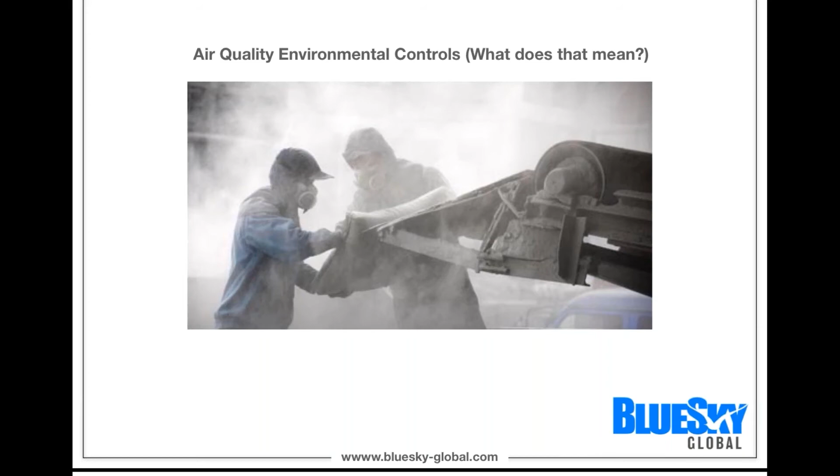So the idea is environmental controls. Why? I've already spoken about it - it's risk reduction. And again, I can't overemphasize, there are toxic dust types where there is an immediate risk to health. You breathe in arsenic dust, you can die right away. The dust that is the dangerous species is the stuff that doesn't necessarily affect you right away.

An everyday example is cigarette smoking. People can smoke for years and feel fine, right? A 20-year-old smoking can be an athlete, can be a sportsman, full of energy, continues to smoke, and then the price is really paid later. So risk reduction, which I've got on the left there, is the paramount reason for introducing environmental controls.

And then the second benefit, which to me is a huge direct benefit, is just cleanliness. If you think about it, a facility that is very dusty, that dust does settle, a large proportion settles, so you've got a dirty environment, you are continuously redisturbing the dust. It smells bad, so any visitors that come in, the whole environment that is under a cloud of dust is always a dirty environment - to the touch, to products, to our clothing, to our hair. So by bringing in environmental controls to control dust, you reduce risk.

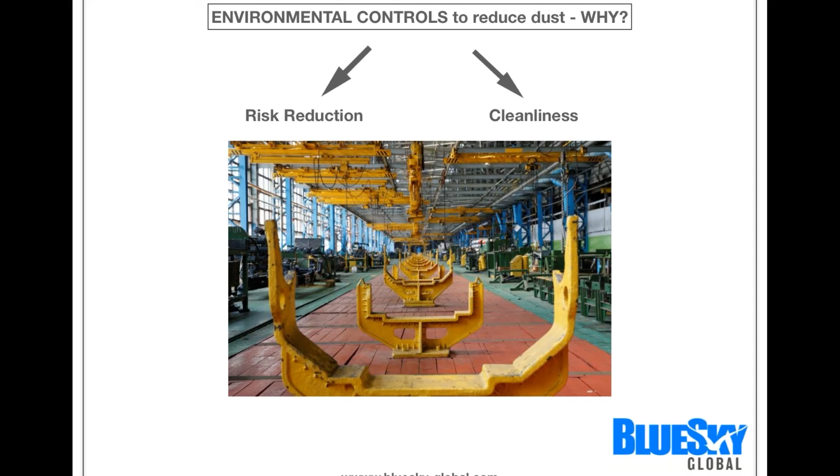By the way, risk could also include explosion risks if it's the food industry, or a type of powder, perhaps a metallic powder that is flammable. So this risk reduction in health, explosion, and then on the other side is cleanliness, which is a huge benefit just in terms of work practices, clothing, equipment, things like that. Okay, moving on to environmental controls in terms of risk reduction and cleanliness.

That is almost common sense. I think it doesn't require a big sales pitch or a huge degree in environmental control to realize reducing risk and cleanliness is an obvious consequence of putting in environmental control for air.

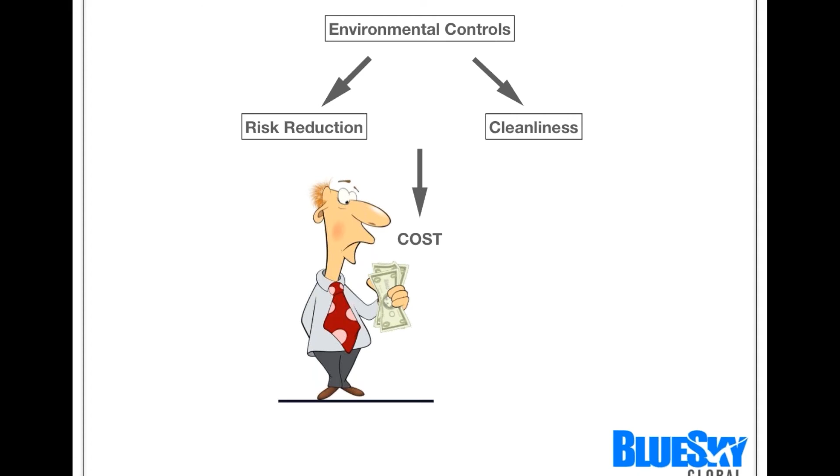But the reality for a business or a retail outlet even, or a warehouse which may have a lot of dusty packaging, is cost. It costs money to implement environmental controls. So it would be naive to say that cleanliness and risk reduction is a no-brainer, let's do it immediately. It is a very, very expensive thing. Okay.

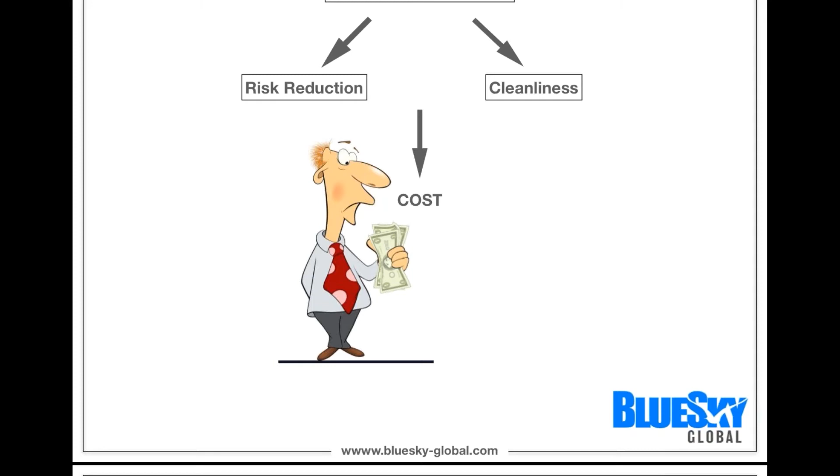So there are two approaches that can be taken. With environmental control, it normally goes to the left process, which is from an accounting perspective, needing to minimize cost. So you want the benefit, but you do not want to have the cost of it. So there's counting the cost. And then there's the value perspective, which is the strategic perspective, where it's like a chess game.

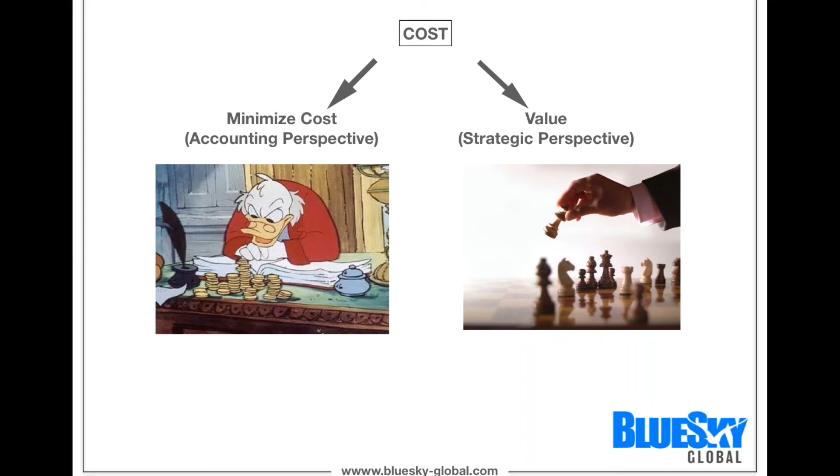You're kind of trying to think about, okay, I've got to spend money. What are my benefits? What are my indirect benefits? I kind of laid it out over here. So from the cost risk perspective, you've got on the one side, what is the cost financially? Remember, this is a financial perspective. What is the cost of one serious health claim?

An example, you may be a factory, or let's take a benign example where you would imagine there's no risk, a big warehouse, and there's packaging that comes in covered in a layer of dust. It comes from a paper mill or whatever type of dust it is, and you have a dispatcher who is always receiving dusty packages, handling them, always getting dust in his lungs, works in the job for 15, 20 years, and after 25 years develops fibrosis of the lung. What is the cost of that individual's health claim?

So that is one cost. Does he request it of the company? Does it end up in lawsuits? In the USA, it could be a lawsuit. It could involve other people in the lawsuit. Maybe other people go, gosh, I have breathing problems too.

So that's a future cost of a serious health claim. Then the next one is the cost of an environmental claim. You may be in a factory producing a certain product and there is a byproduct. This is how I ended up designing and developing Blue Sky as an environmental control dust collector. We did metal coatings, and one of the byproducts of our metal coatings, they were fabulous. They were nickel chrome alloys, but one of the byproducts was hexavalent chrome. So as we were spraying these nickel chrome alloys, chrome was being liberated.

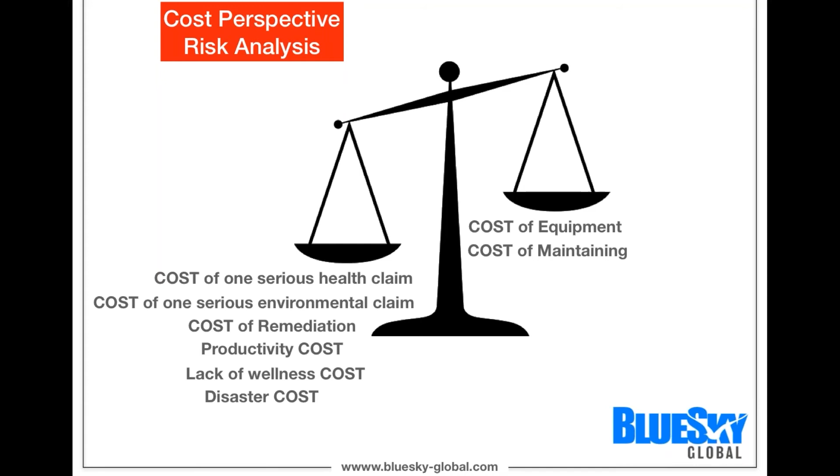And of course the benefits analysis, which is not usually in the accountant's realm, but in the CEO or operations manager or human resources divisions of companies - you have healthier people. Clean workspaces means they are proud of their workplace. Housekeeping improves. Imagine a warehouse that's very dirty - the stock taking, the control of everything is all impacted by filth. So by controlling airborne dust, pride in the workplace improves, and there's a culture of excellence.

I did one installation in Holland a couple of years ago of Blue Sky, and the CEO was very, very motivated by the benefits analysis in the beginning about reducing risk, that kind of thing. When I met with him two years later, as a hindsight analysis, I wanted to know what he thought was the best benefit. He said it was client recognition.

He said he had several clients who walked into his facility and said, wow, your facility smells clean. We've been in many manufacturing facilities, but your place stands out to us, we're impressed. So client recognition was something he actually checkmarked as an unexpected major benefit to him. He gladly took his people around the workshops, and they recognized the difference.

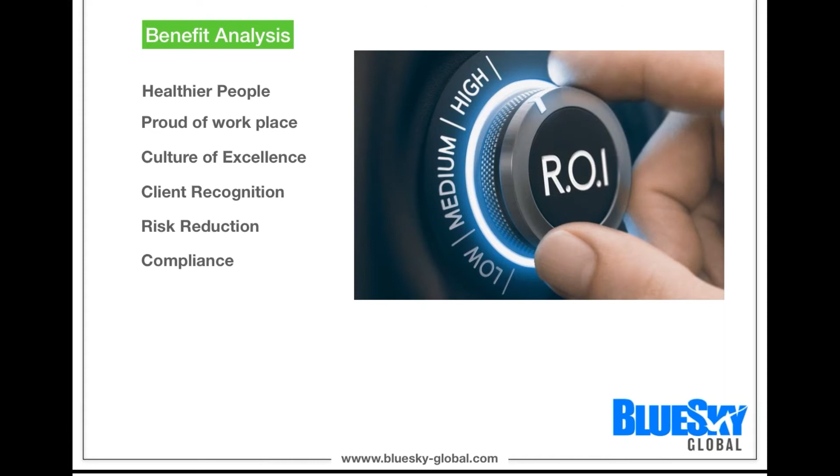So those are the returns on investment of putting in air quality control. With all that analysis paralysis done, it's time to go out shopping. The question really is, people are buying a mousetrap, and there are lots of different devices on the market to catch a mouse. Are all mousetraps born equal?

One thing I have to say right now is that a mousetrap, by definition, catches mice. A dust collector, by definition, collects dust. So the actual functionality of 99.9% of dust collectors is good. The question is, are they still equal?

The answer is that you have to dig a little bit deeper, and it comes down to, once you've caught that mouse, what do we do? There are many, many devices you can buy that can catch the mouse, but exactly what happens when you've got the mouse, or how you set the trap - there's big variation there.

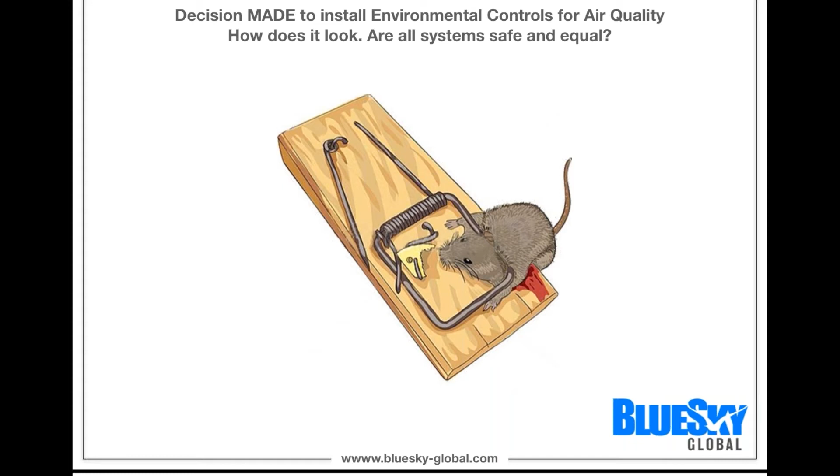There's a reason for that. Once these dust collectors have been in service and collected all the stuff we don't want to breathe in and don't want to have in our lungs, it's now in those filters. It shows you how big those filters are. That is where the concern comes.

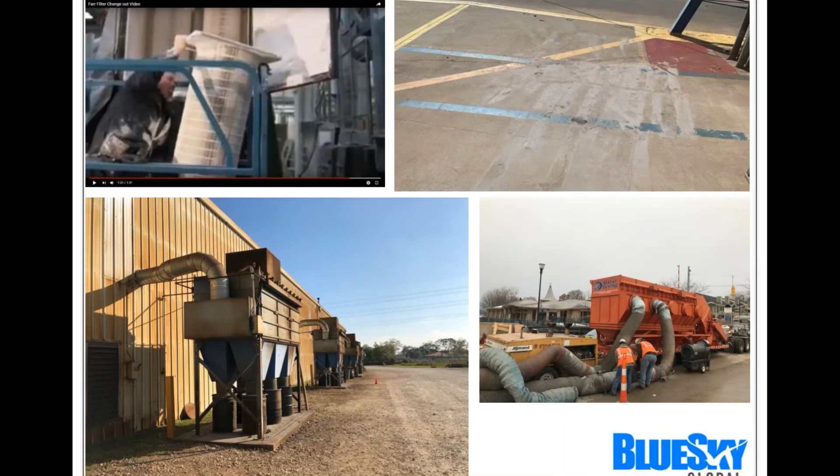And that's where Blue Sky came from, because the reality is that dust collectors using the mousetrap, top left, these are heavy, dirty filters. And you look on the ground after a service, you've now got all that fine particulate on the ground.

The wind will blow it. It'll be all over people's clothes. Yes, PPE, all those good things, but typically when you're servicing a dust collector, you've contaminated the ground, you've contaminated the air around that, and the equipment that lifted people.

That's the real world. You can see bottom left, that is an installation that's been in for a while. They did a soil test there, and it's completely contaminated. They're going to have to excavate down a couple of feet, and do something about all those buildings. That's after years and years of work.

You can see on the right-hand side bottom, there's a picture of a dust collector that went onto a bridge project, in Charlevoix, Michigan. That's a drawbridge. They brought in the dust collectors because they couldn't put the dust in the water. They were sandblasting, repairing, and painting that bridge. So they brought in the dust collector, and you can see how fantastic the real world looks.

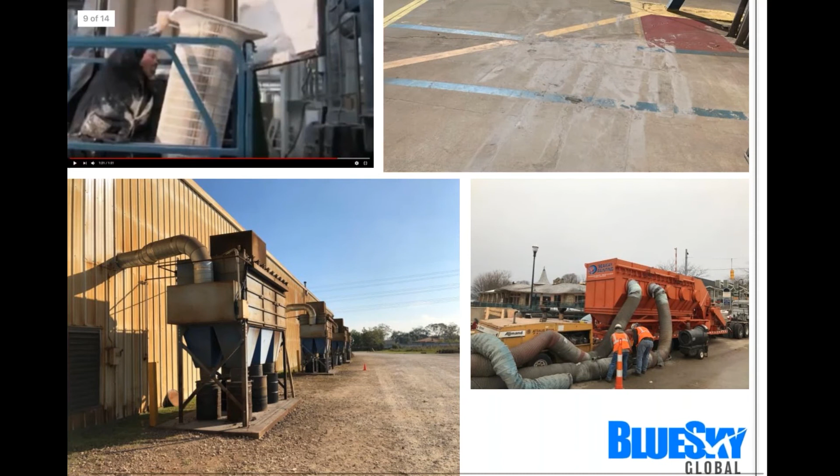Okay, so that—I was dealing, with my previous company, with filters that looked like that, but covered in hexavalent chrome. I was dealing with the environment.

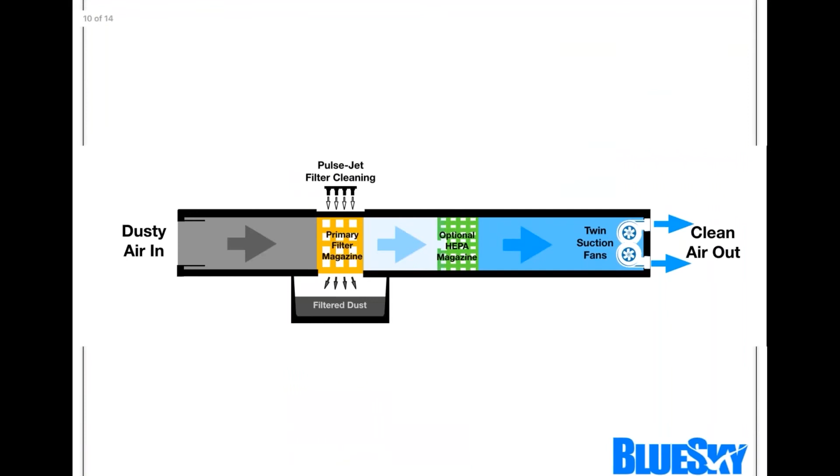Oops. Looks like my presentation is having trouble. So let's see, that slide seems to have been killed. Okay, I've lost the slide. Sorry, there's something wrong there. But I was having trouble with the heavy filters and the soil conditions being really, really bad.

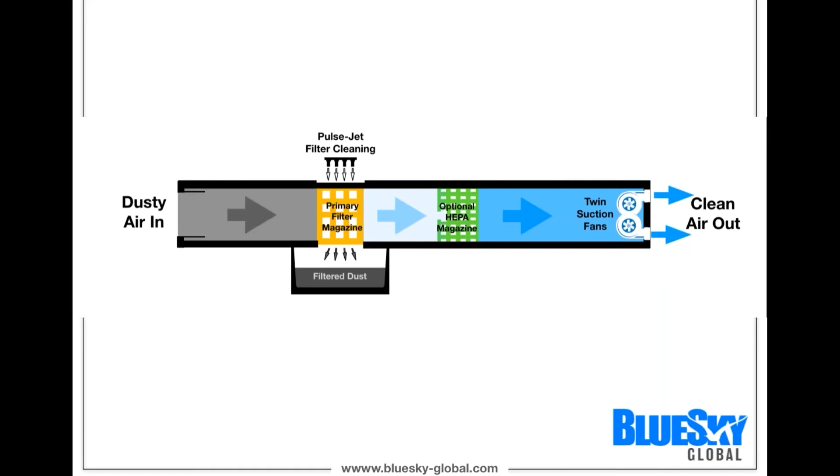Okay, so how does a dust collector work? Very, very quickly: dusty air goes in from one side. On the left-hand side, you can see dirty air comes in. It goes through a primary filtration system. In the case of Blue Sky, that would be an F8 or a MERV 14 filtration.

It collects the bulk dust on the surface of the filter, and there's normally an online pulse jet cleaning system, something that knocks that accumulated dust on the surface of the filters into a bin below. That bin has to be cleaned out from time to time. So that collector gets opened, and that dust is removed. So that's actually another potential point of contamination.

Then the air comes out of that primary filtration. In many cases, it then gets vented to atmosphere through the fans, but there's an optional step where you can put it through a HEPA filter. That'll take the ultrafines out. And if you put it through a HEPA filter, you can actually put the air back into the facility.

So if there's air conditioning or heating in the winter, a Blue Sky machine, for example, has primary filtration to remove the bulk, and a secondary filter so you can return the air back into your facility without any of that fine dust. And then there's suction fans that actually suck it through the system.

So in the best dust collector systems, the primary filter and the HEPA filter are both under negative pressure when the system is running. A lot of companies try to put a HEPA filter after the fans, on the positive pressure side. That is not a safe way to implement HEPA filtration.

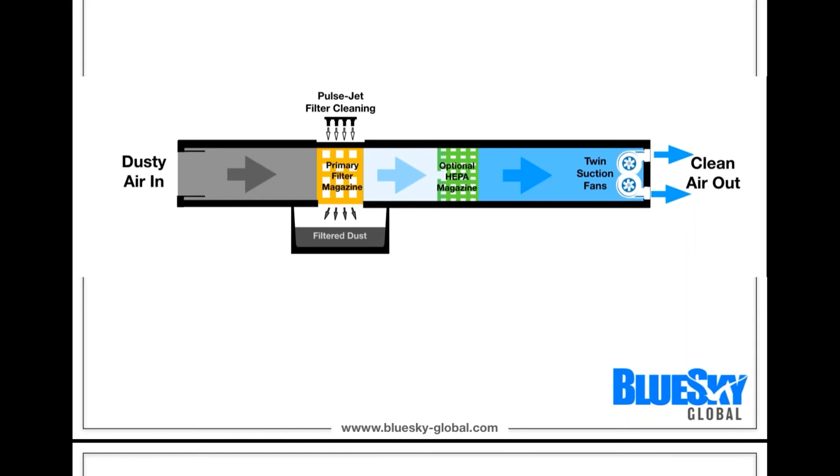We had Tyvek on, we really, really worked hard. It sometimes took us two days to do a filter change just because of the safety aspect, but there was always a mess. It was impossible to avoid.

So the idea was to design a system where the filters are inside a smart box, and when it's time to change the filters, you just pull the dirty part of the dust collector out. The filters are in a box like an inkjet cartridge, and you put a new one in and your dust collector's up and running.

So the things that you really want with any dust collector you buy: it needs to be efficient, and it needs to be a dust collector first. Ideally it should have easy, low cost of installation. It needs a good way of collecting the dust, storage at the bottom or within the unit, and low downtime during servicing. If you're in a facility with high production rates, every hour or day the dust collector is offline for servicing stops production.

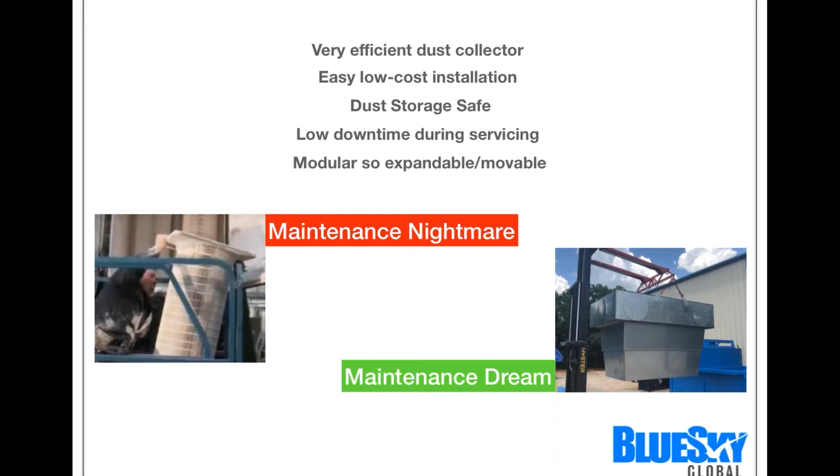And that is my first part of the presentation. So I think we can open up the floor for some questions.

That was great. It does look like we have some questions rolling in here. Jim asked: a lot of technical jargon is presented when being sold a dust collector, so what information matters and what is just noise?

Okay, so I would say the most important starting questions anybody should be asking themselves are, for the industry they're in and the dust type, how many room changes are required? If you're in a sandblasting booth and you're actually sandblasting in the booth, the legal requirement or ideal operational requirement might be 20 times an hour of air change. It could be that you're just in a general fabrication area, you've got some welders, some assemblers, maybe 6 times an hour is enough. So the first question is, how many room changes do I want?

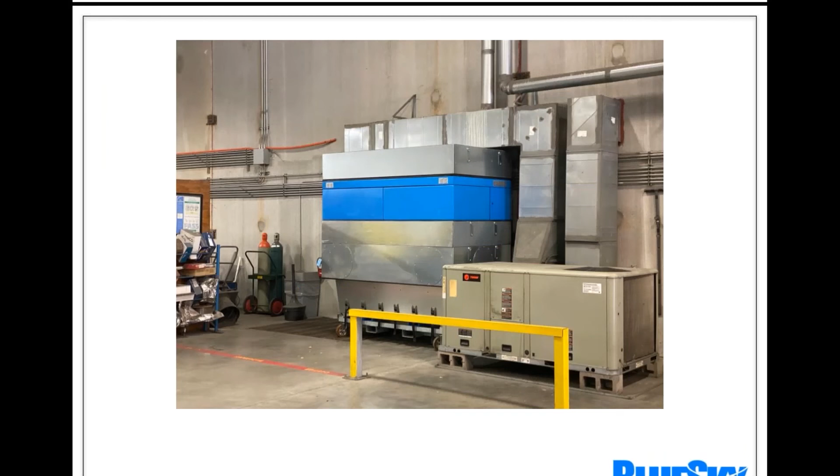And you can see from the Blue Sky, this machine here, that's actually a system that has been put together purely to filter out. It's got the main HEPA stage there to take out approximately 20,000 CFM of air, so it can do about 10,000 square feet of cleaning of the air for removing coronaviruses from large spaces, whether that be a hall, a conference facility, a temporary hospital, a dentist's office, a voting hall, anywhere like that. A Starbucks - on our website we have a Starbucks in there. Anywhere where people gather, move through the area, continuously circulating, a doctor's waiting room - that's where Blue Sky offers an amazing solution to continuously replace that air with filtered air and prevent people essentially breathing in somebody else's aerosols.

That is good to know. BR also has a follow-up question. He wants to know, does your system work effectively against hydrocarbon soot containing exhausts?

So hydrocarbons, I presume he's referring to volatiles, potentially VOCs. Blue Sky has these sections - let me go back to this here. So generically from the outside they all look the same, but within that unit there can be carbon, activated carbon. We have a section with activated carbon in it, and that's an adsorption process. It's a huge bed of carbon. That whole bottom section is actually loaded with carbon, and the air is passed through carbon for adsorption of VOCs or any other gaseous smells, essentially.

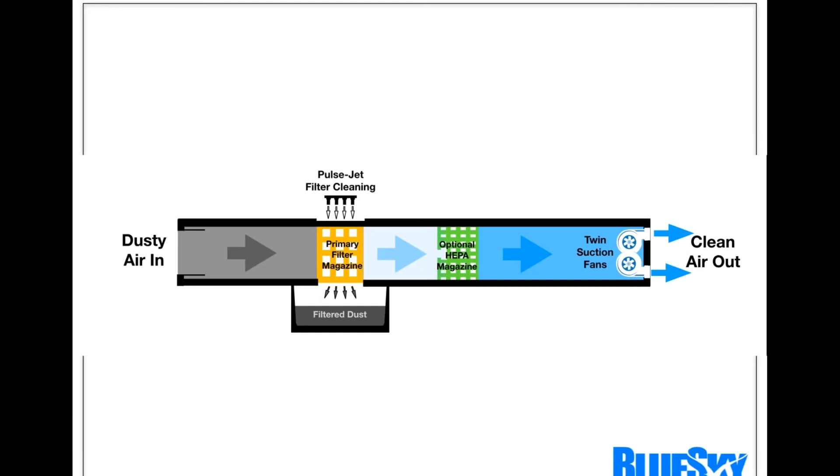So what I tried to lay out in this slide here, let me go back here—hang on, maybe it was a bit further down. This is basically the standard I would say: you want a very efficient dust collector, which means it's a good design and the air to cloth ratio is the correct one, so that the filters clean properly. So you want a good dust collector which is sized correctly, with easy low-cost installation. A lot of dust collectors need a slab, things like that, so the installation costs can actually be quite high.

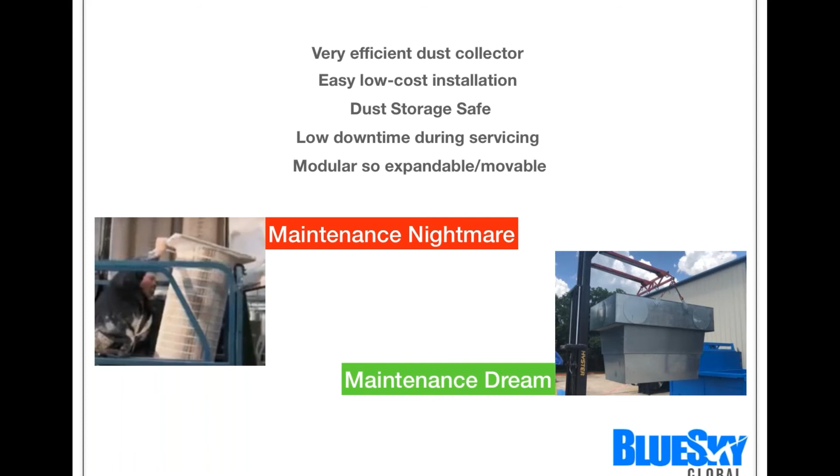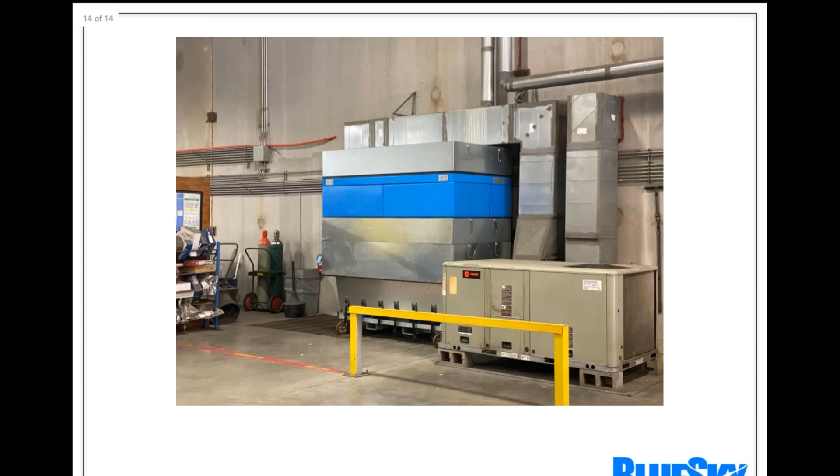In the case of Blue Sky, we have a special design—we don't need any slab preparation at all. In fact, we can install a dust collector in a parking lot in 5 minutes, or it can just be put into a building on wheels. So installation costs can actually be quite high, and they're often overlooked. Then the other one is the dust storage at the bottom.

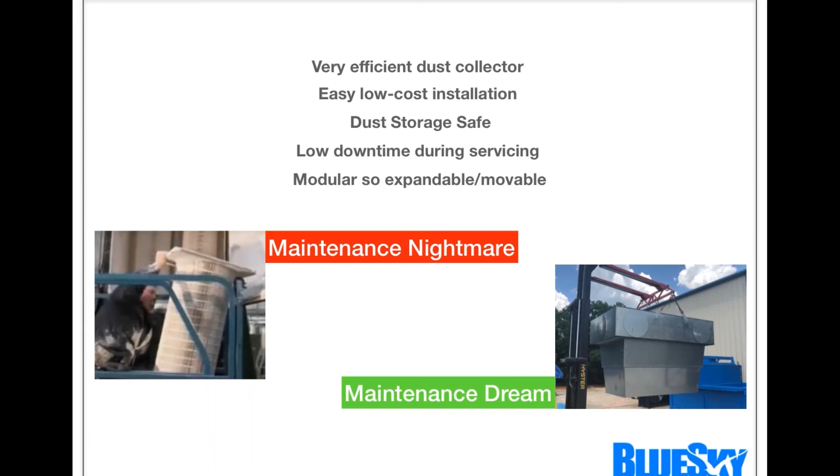Most dust collectors have drums. I want to show you something here—that's such a good question, I hope this doesn't go unstable on us. This is a brand spanking new, beautiful dust collector at a welding facility, I think it was out in Arizona or somewhere, can't remember—I took the picture on one of my road trips. You can see the storage facility for this ultrafine welding dust is drums underneath those dust collectors, and that looks very sensible. There's nothing sensible about that at all.

Look at this facility, how crazy this is. Imagine that once those 55-gallon drums are full of welding dust, they will be substantially heavy. So somebody has to go in there with some kind of lifting device—you can't drive a forklift back there—and try and yank those drums out from under those machines.

That's very poorly thought out, to be able to remove drums. Typically with an installation of a dust collector, a slab is poured. But that slab is very hard to access because the drums are normally up a step or something. So the storage at the bottom is a problem.

After about one or two drum changes, because they have to be opened up, that ground below will become contaminated. As you take those drums off, there's a certain amount of dust that's always going to fall onto the ground as somebody is trying to take the old drum out. It's heavy and awkward. Then they're trying to put a new drum in, and putting the lid back on, and there's a whole lot of spillage. That's why after some years it looks like that on the floor.

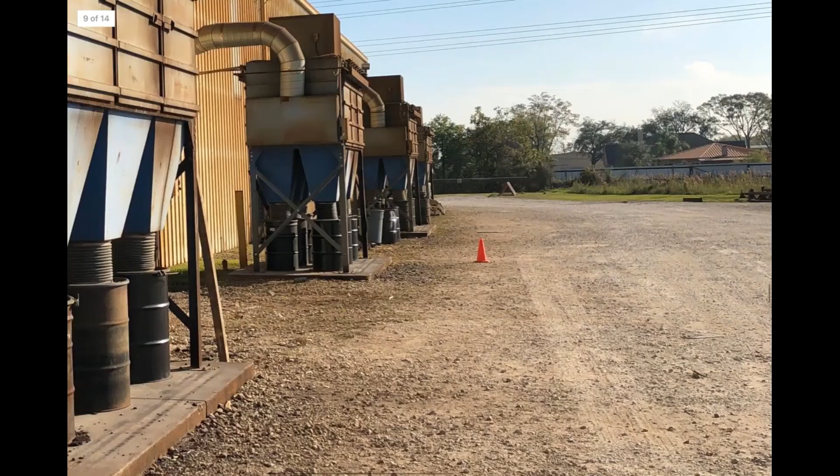Because those drums that are being changed out, it is not easy. Do you see what I mean by the slab? Somebody has to get in under that slab and take those out. And those drums are heavy. These ones aren't even on a pallet base, so heaven knows how those guys get them out. It's just left to somebody to take care of.

Typically what would happen within a day or two, the wind would blow all that rubbish away, or maybe somebody would broom it, or it would be washed off into the drainage ditches at the back of this facility. They had absolutely no idea this was going on. So that's the terrifying part of that.

So back to my list: dust storage safety and the maintenance, low downtime during servicing. Again, to do the job properly of removing the drums and the filters, it can be one or two days of downtime for the facility, maybe weekend work. That's a big deal for certain production facilities, and certainly a big deal for people.

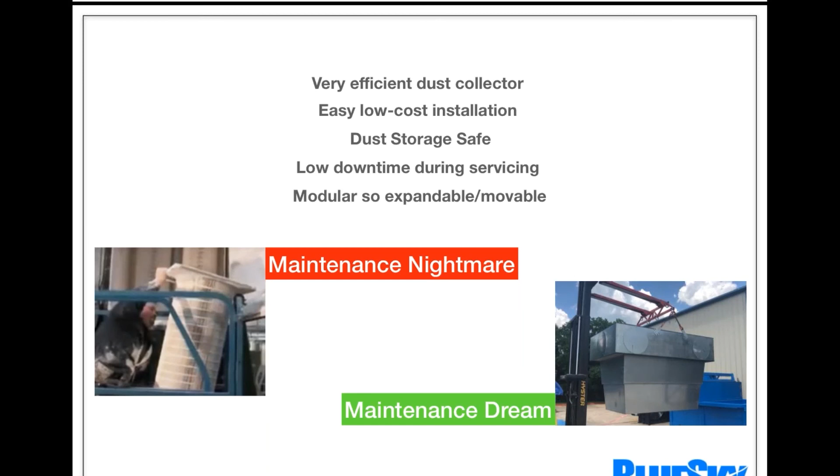And then the Saturday or Sunday arrives and the weather is bad, it's rainy, it's windy. Maybe in Texas it's incredibly hot and humid, and you've got guys servicing a dust collector at height, doing this work outside on a hot, humid day or maybe a stormy day, and they've got to get it done. So downtime during servicing is a big deal to take into consideration when you're putting in a safe system.

And then, of course, the modularity is important. Facilities change, you may want to move the equipment, maybe you want a temporary facility. Keep in mind a dust collector is an expensive investment, and in the future you may want to plan for expansion possibilities, what's required. These are all things I was dealing with personally.

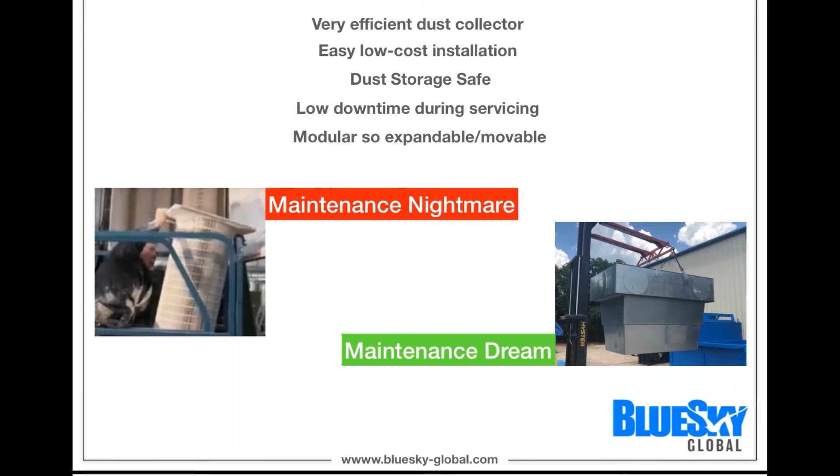I was not from the dust collector business at all. Right now, even though I own and run a dust collector company, I still feel more like a missionary, because I'm passionate about doing these things safely and practically and saving money. I used to use dust collectors until four years ago, I used to purchase them, and now I'm in the business of trying to bring to the market a much safer way of doing things. I sometimes have to remind myself that I'm not a user of dust collectors anymore, that I'm in the business of trying to promote smarter dust collectors.

Great, that makes sense. I think this is a great question from Mary: she'd like to know how the captured particulate is disposed of.

I don't want to answer that question. Next! No, humor aside, that is handled.

Typically the final resting place of a material that was captured out of the air could be as simple as a landfill where anything is dumped. It could be, if it's cement dust or from a drywall project or something like that, it could just be dumped like they would dump a vac truck.

So it could be a landfill or something, think of vacuum trucks, vac trucks. It would go to the same final resting place as that.

If it's a more dangerous type of dust, maybe asbestos, hexavalent chrome, or lead, we do a lot of lead cases where people are rehabilitating a facility where there's lead paint involved. Those have to go to designated landfills or designated processors of that waste. Again, the nice thing with Blue Sky is the smart box is taken away to that processing facility as a sealed box. It is not opened up at the place of generation. So nobody's opening up a container and changing filters that may have asbestos all over them. The whole unit is taken away, sealed to the facility if it's hazardous waste.

So the key thing with Blue Sky is that smart box, that dream maintenance, that box is handled away from the back of your building or away from the site. So for the coronavirus, let's say that's a coronavirus machine, and after a year it needs a filter change.

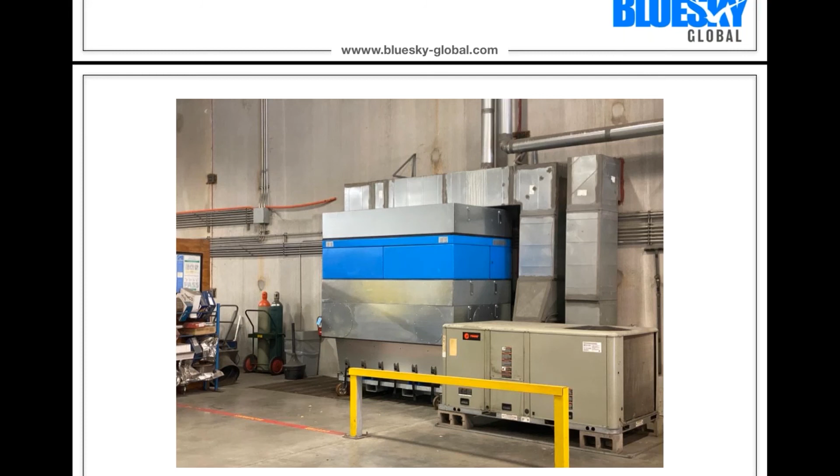The key thing with Blue Sky is nobody is going to open up those disgusting filters at that site. The smart box will simply be taken out. It'll be taken to a medical waste treatment facility for sterilization and treatment. And then new filters can be fitted at that site and recycled back. But nobody is going to open it up. There is no service technician in a suit ever doing the removal and maintenance of that machine and its dust. It all gets taken away to a company, Stericycle, Clean Harbors, Waste Management, Republic Waste, whatever it may be, who as a career deal with waste.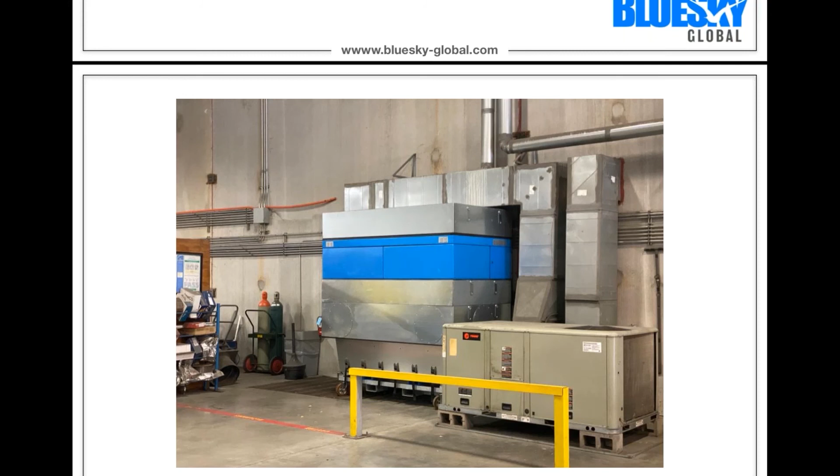The waste handling is no longer done at your facility, so that you end up with this kind of nonsense at the back of your building. Look at that, it's just incredible.

Right, that's a good point. Teresa would like to know, how does a facility, or can a facility, retrofit to an up-to-down airflow if it has a typical HVAC system?

Okay, so the bad news is it can't be retrofitted per se. What we are doing in all these spaces is that the HEPA filtration, the laminar flow system, is in parallel or is a separate system from the air conditioning system, because air conditioning systems are not designed to handle the type of airflows you need. They are not designed to handle contaminated filters very well. And so the last thing you actually want to do is suck a whole bunch of that garbage into your air conditioning system. What Blue Sky will do runs 2 or 3 times harder than your air conditioner.

It's continuously filtering the air because it's HEPA filters. The right size of HEPA filters needs a very powerful fan in order to draw the air through the filtration media. And HVAC systems typically do not have the correct power in their fans to enable HEPA filtration. So if somebody retrofits a HEPA filter into an HVAC system, something is not right, because the fan is not designed to suck through HEPA media, which is really, really dense. You need a much more powerful fan system.